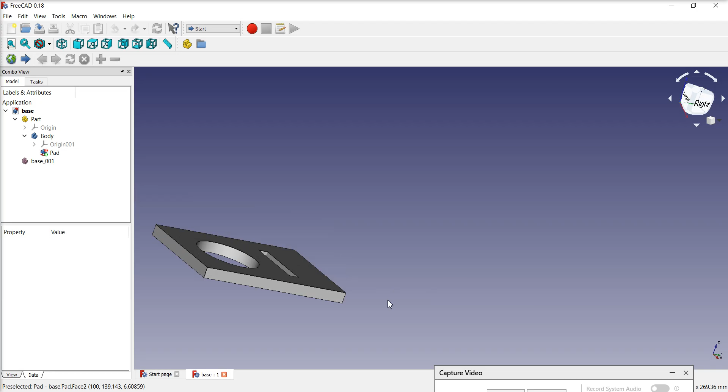This is what your software is. I would like to show the file already created, so I'll just say open. I'll show existing files I have made for assembly. One is the base, I'll open that file. So this is my base, I can show you here, this is my base file.

Another file I have created is vertical, saved with that word, I will open here. So you can see there is a vertical file I have created. What I have to do is assemble these two parts together. I'll show you in this video how to assemble those parts.

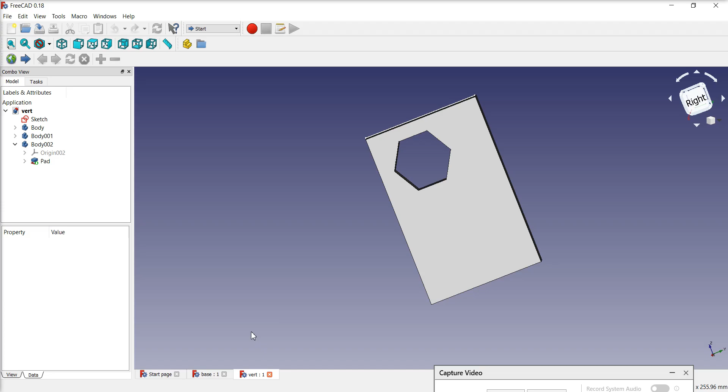What you have to do is go to the file menu, say new. So this is your new file. You have to shift to the A2 plus workbench. This is our drop down menu where till date we have worked with the sketcher, then the part design, and the third part we are going to work with is the assembly, that is A2 plus. As Assembly 2 wasn't working for this computer I'm using, I'm using A2 plus for my final assembly. Let's select that option.

Save this file, I'll say assembly, is my final file. So this is what I have: base, here at the downside I have vertical, and at the end I have assembly.

So with the assembly, what we have to do is, here we have got so many tools. We should be able to make use of these tools. What we can do is import those part files here.

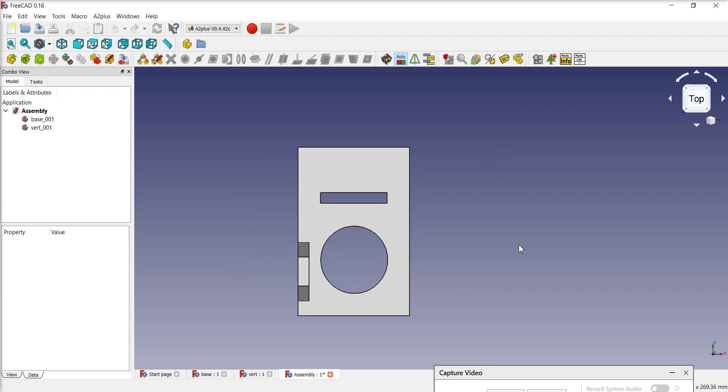This is the first small icon that we can use to import those files here. Click on this, open your base file, say open, scroll up, scroll down, and this is my base here. Click. Another file I have to open, this is also my other file. So you can see this is my file.

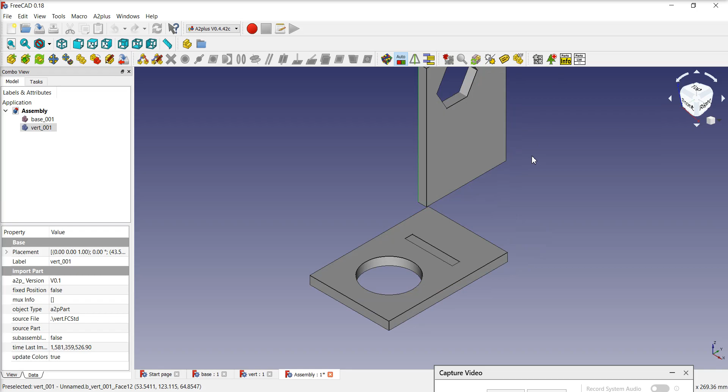What you have to use is select this, go to navigation style, go to CAD, right click and navigation, so you can shift this. Let's say I want to keep this here. What I have to do is I want the base of this attached to the backside, and the downside of this edge should attach to the upside of this edge.

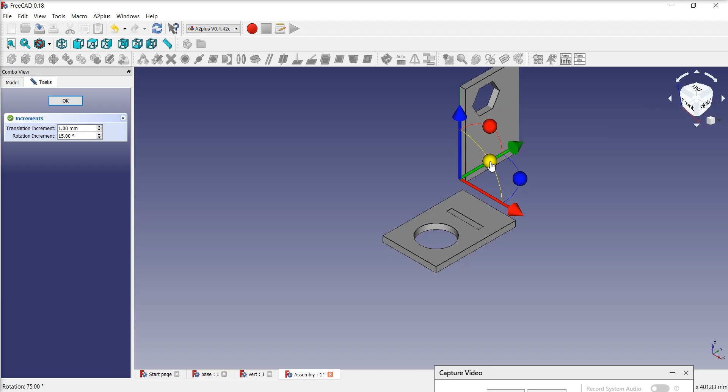So what I can do is use the move tool, a small icon, select that icon. This is what I can do, see, so this is how I can move my object. Right now I'm trying to... okay, this is the axis in which I can move.

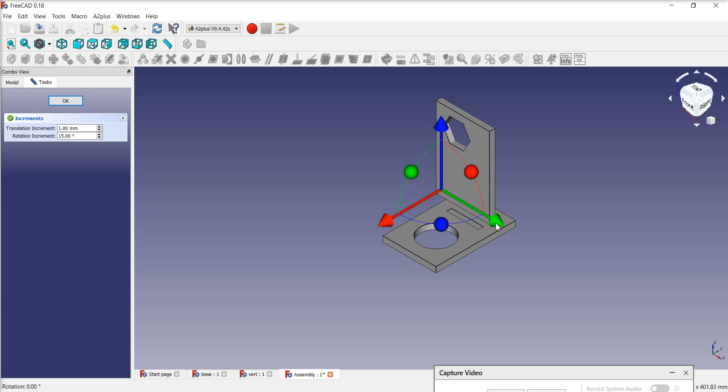What I would like to do is move this part in this direction. Okay, and this is the other direction I have. I want to move it to this side. Okay, so this is what I can do. I have to take it a little to that side. So this is what I'm able to do.

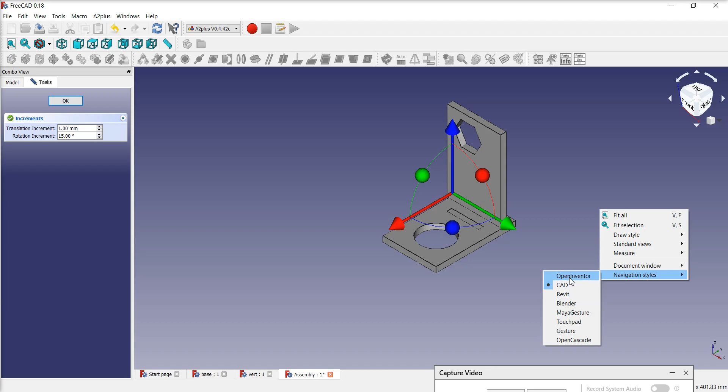Let's right click, navigation style, I would like to OpenInventor. So I'll be able to move it to this side. This is not the same plane, so what I have to do is also move it in the Z direction. Go to CAD again, yes.